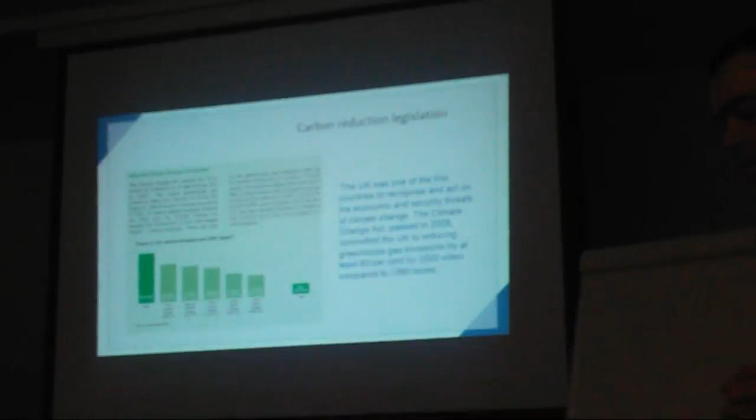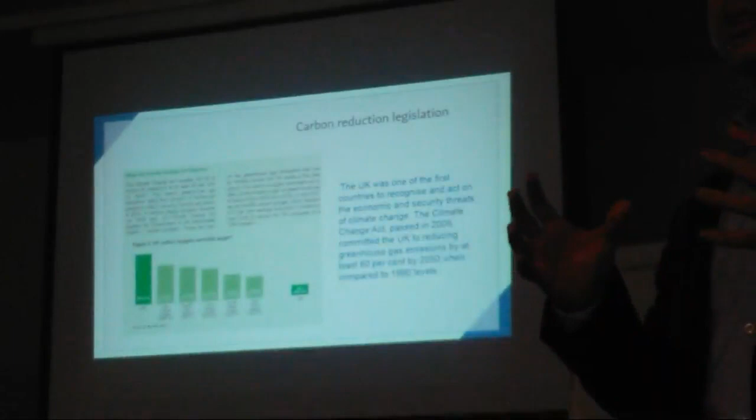So, energy policy - where do we start? Speaking to civil servants and also to government representatives, the expectation is that the heating market over the next decades will have to change radically in order to meet legal targets that are binding - for instance, the Climate Change Act and the objectives set in 2008. I think the only way to achieve this is through policy which is visionary. The problem is that the market will not move by itself, so it is necessary that there is some sort of intervention by government to make this happen, to create incentives to take up low carbon technology, but also through changes in the regulation.

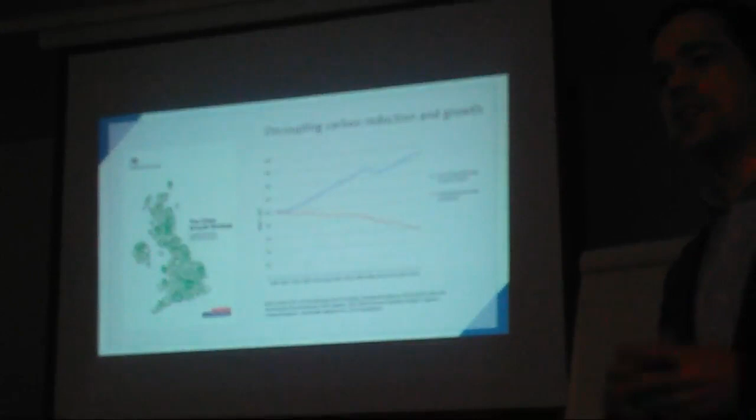At the moment there seems to be a tendency to focus more on regulation, and there's a feeling that perhaps subsidy is less effective in achieving the objectives. A key area is climate policy, as I said before. The Climate Change Act of 2008 set up carbon budgets that are binding, which the government has to meet every few years. What is characteristic in the UK is that the government embraces those climate targets. There was a seminal publication a couple of months ago called the Clean Growth Strategy, where the government said reducing carbon is at the heart of our industrial policy, and that reducing carbon emissions wouldn't affect growth negatively. As a matter of fact, the government said that out of all the G7 countries, the UK has reduced emissions the most and has achieved the highest growth.

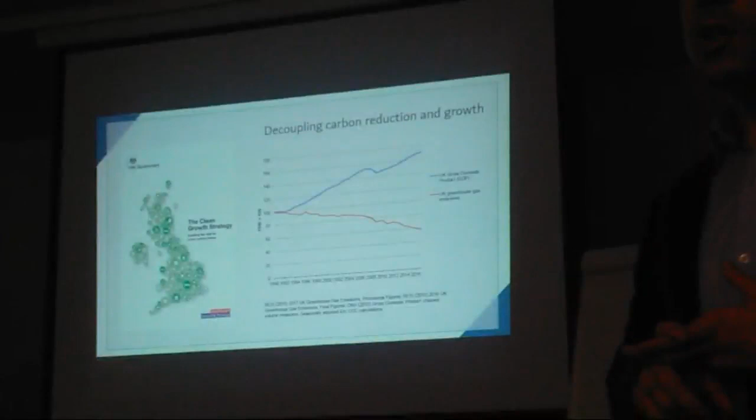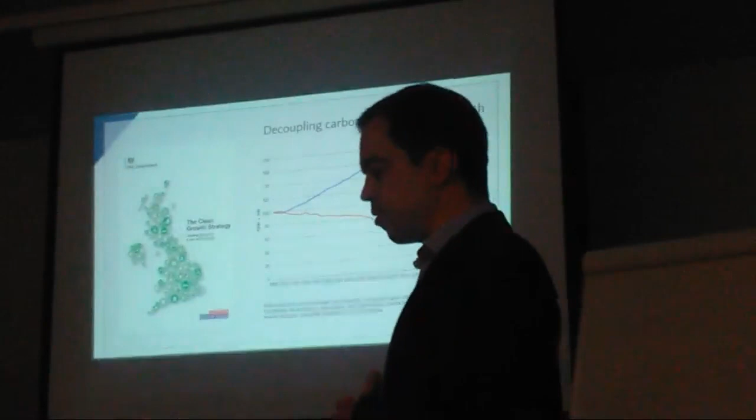Therefore, one doesn't contradict the other. And it's telling that one of the key streams in the government's industrial strategy is clean growth and decarbonization, and there is a lot of appetite to invest in those technologies. What's interesting for us is that a big share of emissions comes from heating buildings.

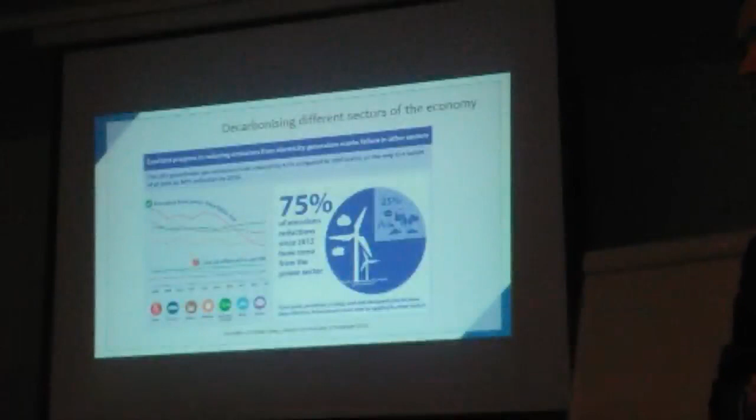You can see the red line there is emissions from electricity, from power, and there the government has been very successful. The main reason why emissions from power have reduced so much is the phase out of coal. That's been perhaps the single biggest success of the government over the past 10 years. That reflects in the carbon intensity of the electricity grid as well, which has reduced radically - although, as Kristen said earlier, not on paper.

But emissions from heating have remained stagnant. Even over the past few years, emissions from heating have increased. So this is not a success area, it's a very big challenge, and it is very difficult to achieve change in these areas. It's proven very difficult.

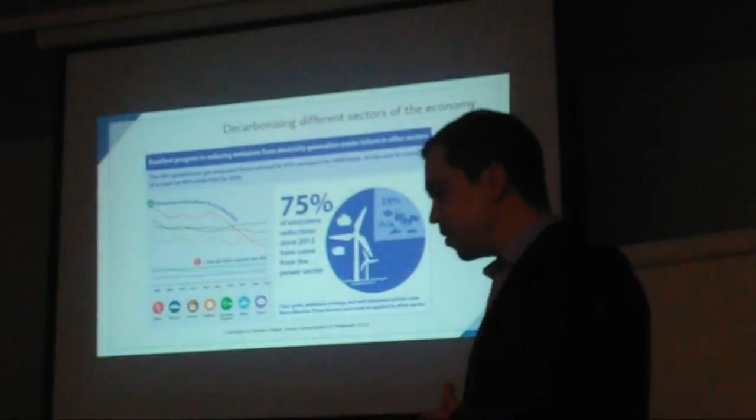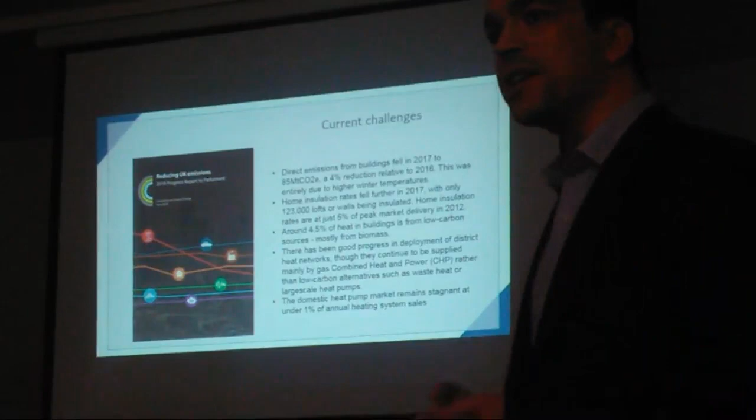These are some of the reasons, some of the challenges stated by the Committee on Climate Change - could be others. So the government hasn't been successful in increasing the rate of thermal insulation in buildings. If anything, these have reduced over the past few years. They haven't been very successful in convincing people to take up low carbon technology.

A lot of money has gone into RHI, for example, but the heat pumps market hasn't moved over the past few years. Despite all this subsidy that's gone out to support heat pumps, the market hasn't embraced it for whatever reason - there are multiple explanations for this, but it hasn't happened.

Heat networks still using conventional CHP. So the big changes - mass deployment of thermal insulation or significant uptake of low carbon heat technology - these things haven't happened yet.

And there is a realization that, again speaking to civil servants, the government has to do something. This is because the market has to change substantially by 2050, and including during the next decade, to meet objectives that are binding.

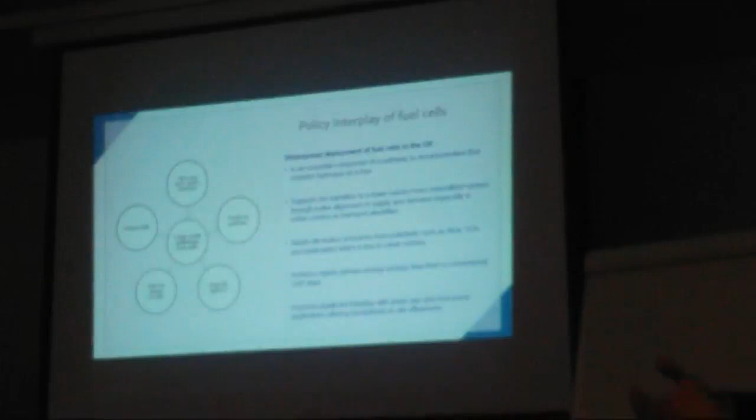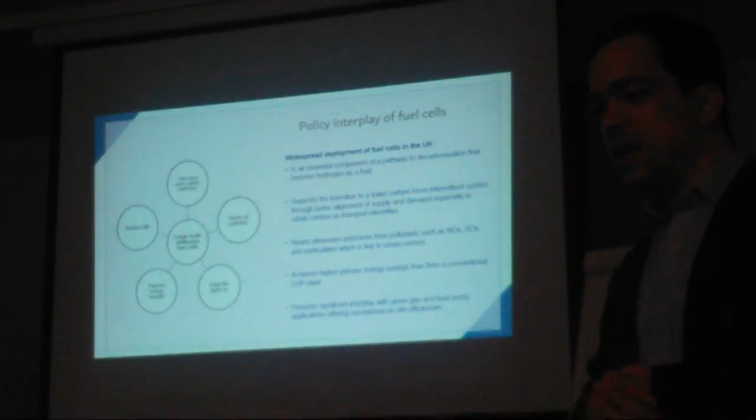So I'd say, concluding, and I'm sure Christian will elaborate, in developing all this new policy, why would the government care about stationary fuel cells? They could be relevant for a diversity of reasons because potentially in terms of efficiency they go a step further compared to conventional gas technologies. They have a very low impact, and might have a role in the context of a hydrogen future, which is something the government is currently considering. So these are some of the drivers that might make policymakers consider fuel cells.

And I'd say the reasons why the government may have to act is that carbon - this is how the government considers intervening in their impact assessments - is that fuel cells bring benefits such as reduced carbon or reduced NOx, that if monetized, make them competitive. For instance, reducing NOx has a value because it has reduced impact on the NHS. These are things the government monetizes but the market doesn't. So this is one reason why fuel cells may be considered, and with some cost reduction, they may eventually become competitive and achieve wider deployment.

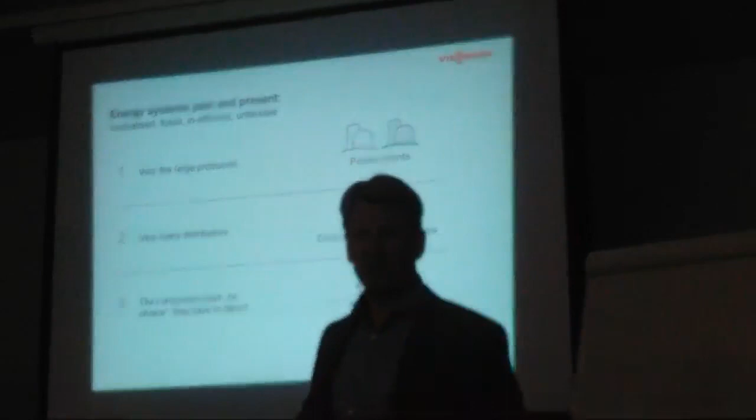So we are trying now to resolve the solution, and we are a manufacturer. Government coming to us and saying, come on guys, what is the next technology after the beloved gas condensing boiler in everybody's home? So we have to sit down, and the government is giving us targets what we need to achieve - carbon reduction, fossil fuel reduction, more renewables, etc. So we're sitting down there and we're coming up with some ideas what we're going to do. Of course, as a manufacturer, we would like to sell it as well, but we need policies, we need backgrounds to do it. On the fossil fuels, on the fuel cell technology or CHP technology, as it is, the whole discussion point came about from where we are now.

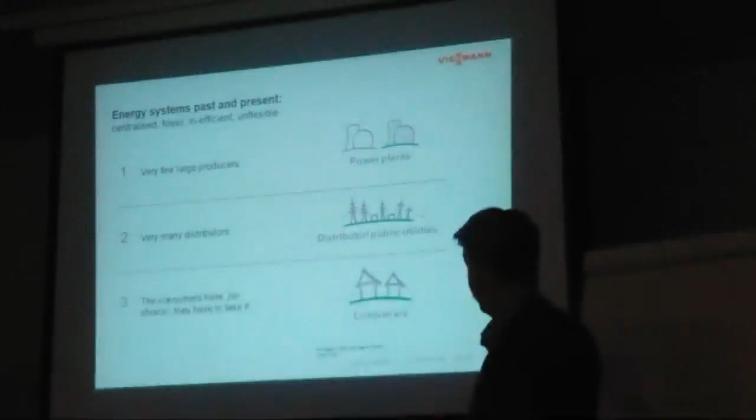In today's world, we are just changing, but historically, or maybe only a few years backwards, we had a very, very clear view of how we're making things. We have large power plants, burning lots of dirty stuff, coal, gas, etc.

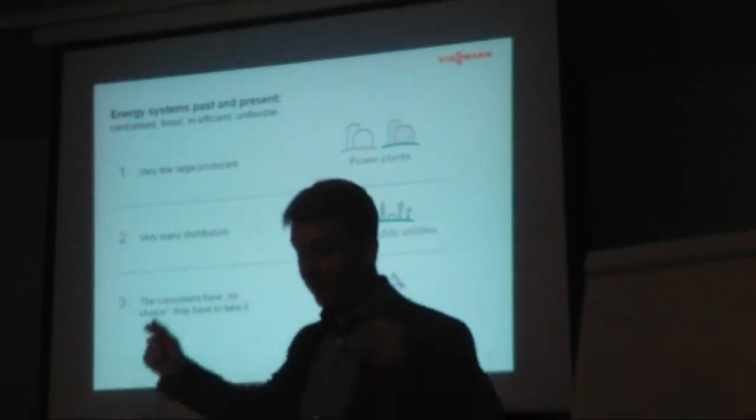Maybe some nuclear power plants, and then we have our distributors, and then they're distributing the electricity to the individual homes, and we're consumers. That was the very simple model. It worked. We plugged our electrical equipment into the socket, we get power, we have lights, the Christmas tree is on, everything is fine.

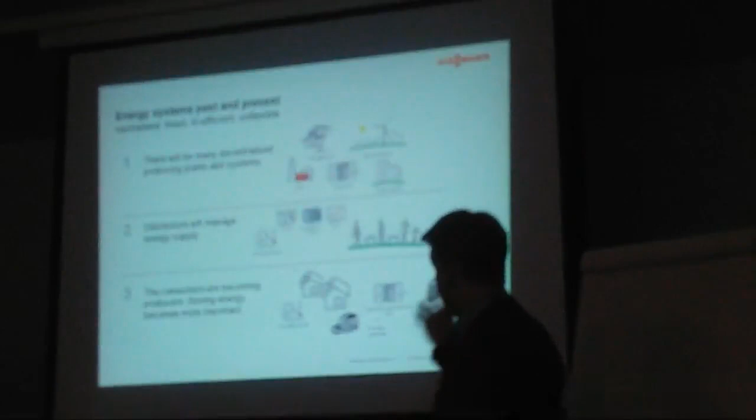But things have changed now. We have more renewable technologies in place. As I say, the UK has invested heavily in wind farms, photovoltaic systems, etc. So the electricity grid has become much greener these days than it was a few years ago. However, it came at a very high price as well.

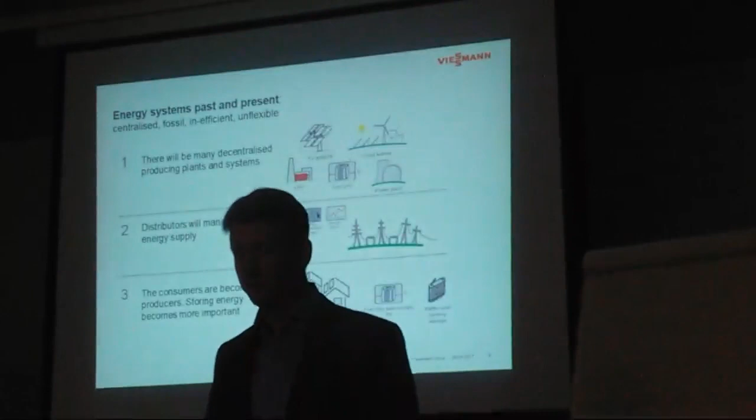The problem now is that distributors manage those peaks and troughs of electricity generation. We have large wind farms scattered around Scotland, for example. How do we get the electricity to the consumers living in Liverpool, Manchester, Sheffield, London, etc.? It's a long way for electricity to travel along the wires.

The Welsh population do not like putting new pylons up there to get the electricity back to Birmingham from their coastline. So there will be an issue there. There will be pockets of areas, clusters in the system where the grid is becoming unstable, and these poor people really have to manage it.

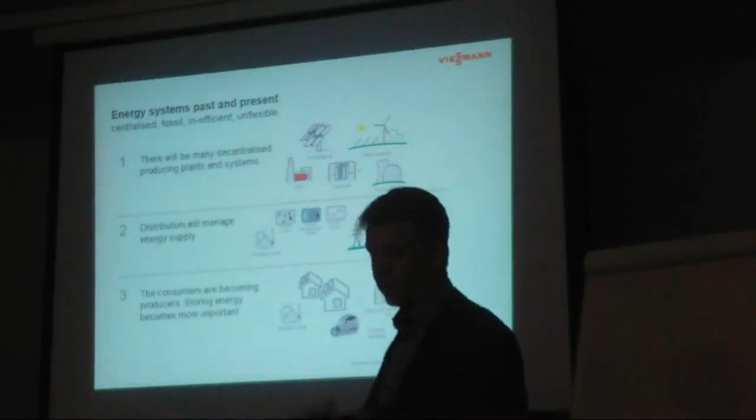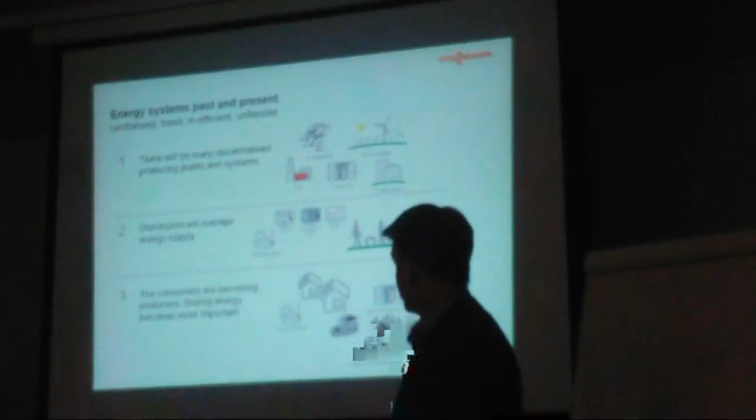So smart grid and smart metering, all these things you've probably heard as well, are meant to be part of it. And also then in the future, consumers are also becoming producers - that was the whole point.

Some of you may have seen it, we have PV panels on individual roofs, and they're fantastic, but PV panels are great in the summer, daytime. Not much electricity is used in the daytime - maybe the fridge is running - but in the evening, that's where you need lighting, televisions, etc. But PV systems don't work then.

So we have distributed peaks. Electricity also becomes more expensive, naturally, with people investing in new technologies. So therefore, electricity storage devices are now becoming sort of the flavor of the week, the month, etc. Storing energy is a problem right now, because the average homeowner pays 14 pence at the moment for electricity per kilowatt hour. Storing a bit of electricity makes it very expensive. But there are different technologies involved.

But why are we doing, you say, micro CHP technology? As I say, it's a technology which puts the homeowner in a position to not only make their heat for space heating and hot water, but from the same device produce electricity.

So the advantage from the homeowner's point of view is that you're creating your own electricity as a base load throughout the year - at night, in the winter, in the summer. So we have a much more stable production. The grid producer loves it because we're taking some pressure away from the grid systems as well.

We're also trying to promote this fuel cell as a transition period. Elias has mentioned as well, hydrogen is now a big thing. It's not in government's views - hydrogen is many years away. It's a starting point. Fuel cell technology is available today, and we believe the transition to introducing these technologies over the next few years is a very important transition period.

But again, this also sets the ground level for new technologies, new developments, and therefore it will create jobs as well, in manufacturing facilities, etc.

But most importantly, from the homeowner's point of view, there are potential savings to be made for them in terms of producing and generating their own electricity rather than buying expensive electricity from the grid. So that's the fuel cell, one of the purposes there.

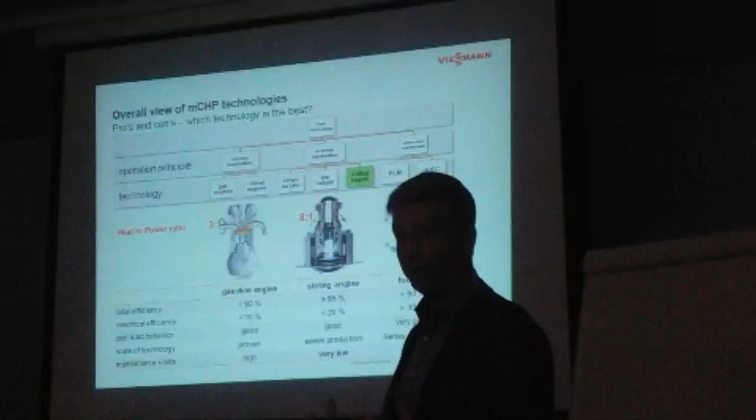I have to say that even the Stirling engine was only a transition technology for us. Our end game as a manufacturer was always working towards fuel cell technology, because of its efficiency, and most importantly the heat to power ratio, which is so critical for any property. Basically any electricity-making generator also generates heat, and that heat has to be absorbed into the building.

The whole point of having a micro CHP technology in the house is the total efficiency. We're talking about over 90%, rather than 35% from the grid, let's say. The fuel cell has got the big advantage of a heat power ratio of 1 to 1.

The Stirling engine has an 8 to 1 ratio, which is the reason it didn't really work in the marketplace. It was also quite noisy, high frequency noise, woke people up in the night, the pipe was shaking. So it was the wrong product for the market really, more for commercial application.

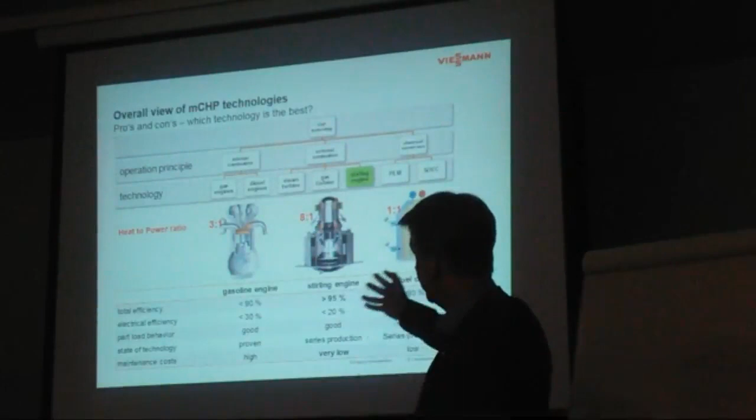The other one is the combustion engine on the left. This is the one you probably see in the commercial world, what we call CHP technology, with a traditional gas engine fitted in. Very effective for commercial applications, not so effective for domestic. You don't want to replace or change the oil in the filter in a domestic application, people will not accept turning up 3 times a year. Commercial application is a different story, very effective technology in the commercial world, but yes, you have very high maintenance costs.

So the fuel cell was always the one which, from the efficiency point of view, the heat power ratio was the most optimum solution. But it was expensive to make.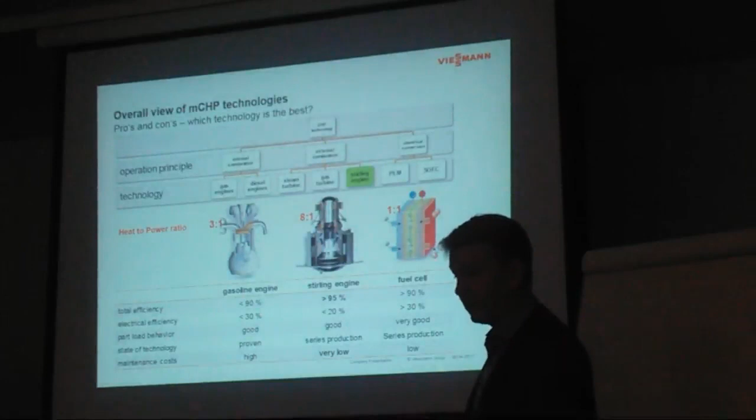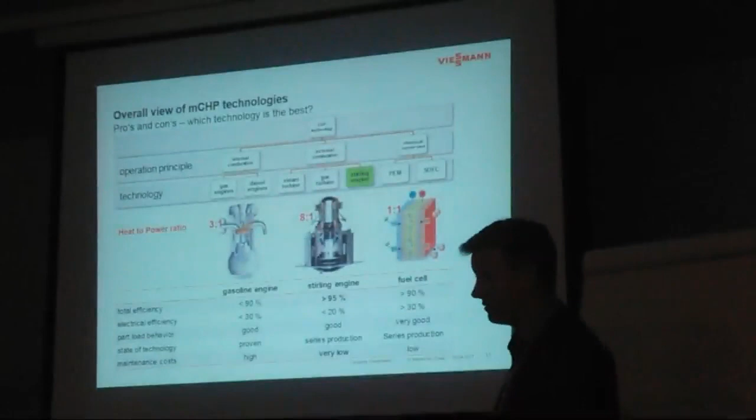In today's world there are 2 types of fuel cell technologies in the market. One is PEM fuel cell, proton exchange membrane fuel cell technology, which is a low temperature fuel cell, and the SOFC, which is a solid oxide fuel cell. I don't want to go into the technical side of it, but these are the 2 significant technologies now established in the marketplace.

Solid oxide, high temperature, is really more for commercial application. It has to run 365 days a year, it's not really ideal to turn it on and off. PEM fuel cell is the one that's more interesting for domestic application, very low maintenance, hardly any at all, but you can switch it on and off when there's no heat demand. So if people are going on holiday in the summer, you can turn this machine off if there's no demand, and you can do that with the low temperature fuel cell. So these are all technologies that are appropriate and proven these days.

This gives a short example of why we are going to this fuel cell technology. Just quickly to understand this graph: the bottom axis is the building heat load requirement. The further we go to the left, we're talking about very efficient buildings, very low energy demand, low water demand, and the more you go to the right, very high energy demand - so new build versus old building, Victorian style, 3-4 bedroom house, very high energy demand.

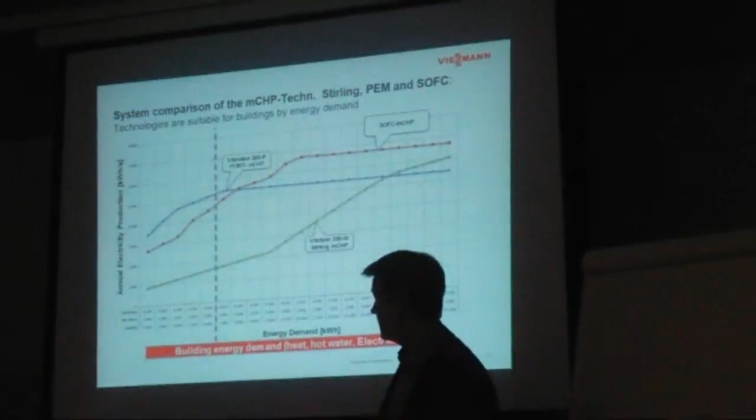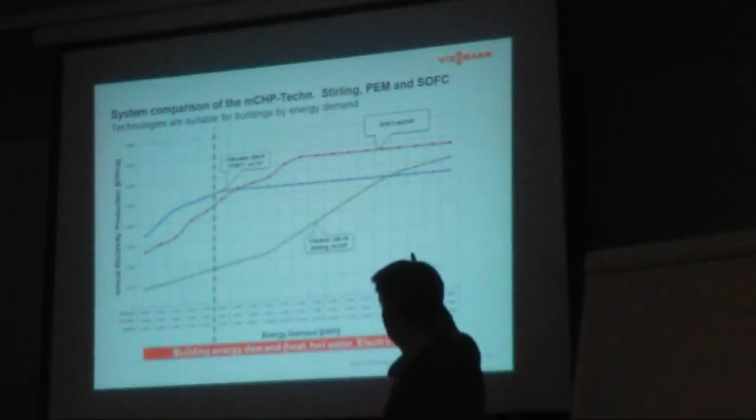The Stirling engine, the green line, on the y-axis you see the annual electricity generation from these technologies. The green line, the Stirling engine, is peaking its output performance at very large buildings, commercial buildings, 30,000-40,000 kilowatt hours a year and higher, generating the right amount of electricity of 4,000 or 5,000 kilowatt hours a year.

The fuel cell technology, particularly the PEM fuel cell, the blue one, you can see is suitable for low energy homes. You can have it for new build, for small properties in the UK, or for larger properties. So currently this technology is employed from small to big, covering I would say 80% of the UK housing stock in theory, in the way it's designed, and you can turn it on and off.

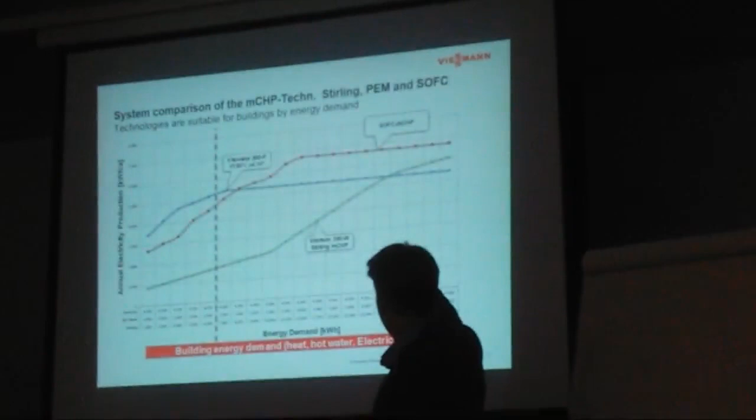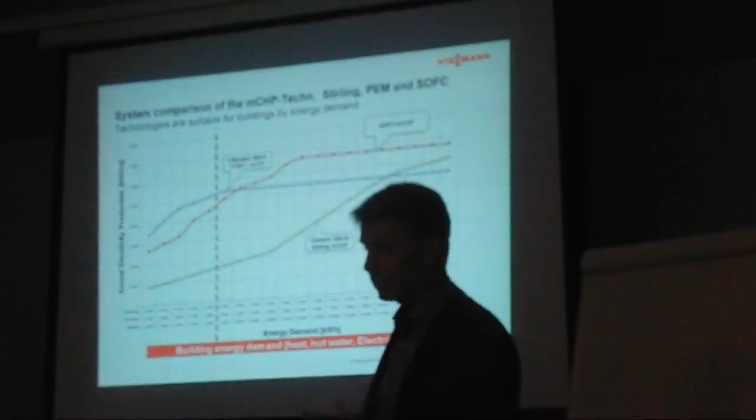The red one is the high temperature solid oxide fuel cell, and again that's more applicable for larger properties, and we'll be using it for small businesses etc. So that is the reasoning for why the fuel cell has been earmarked as the most applicable technology for residential properties in this world.

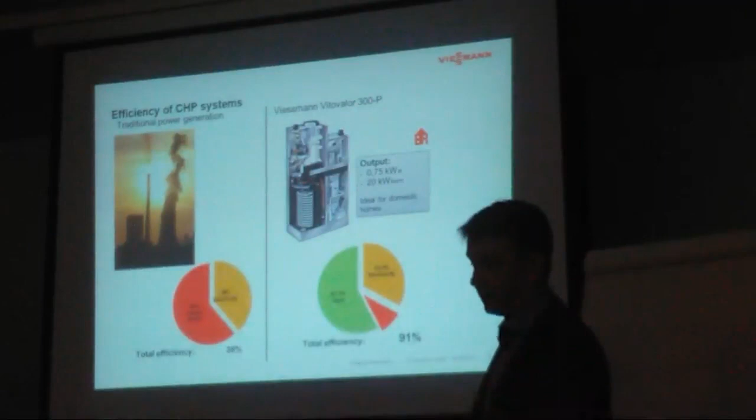Going further, yes. So again, traditional power generation currently has an efficiency of about 38%. That means from the primary energy factor point of view, the energy we're putting in to make electricity, including losses in cables and transmission, we're talking about 38%.

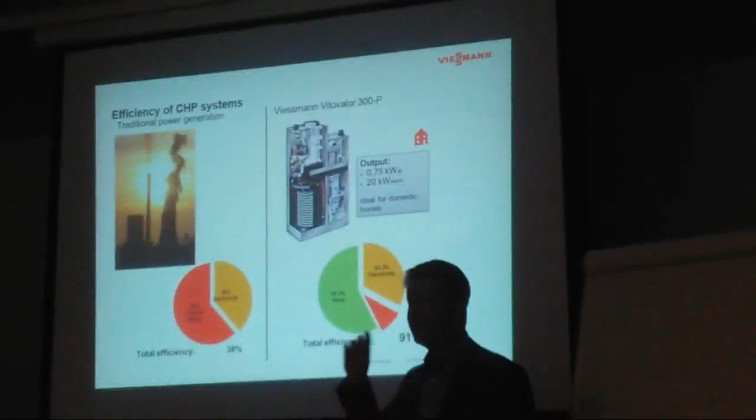The total efficiency of a decentralized micro CHP technology, a fuel cell technology, is more than 90%. Interestingly, if you just look at it from the electricity point of view, fuel cell micro CHP versus grid power, the efficiency is very much the same. The key point is why this technology is so efficient is because of the bit of heat it generates, which you use for heating and water.

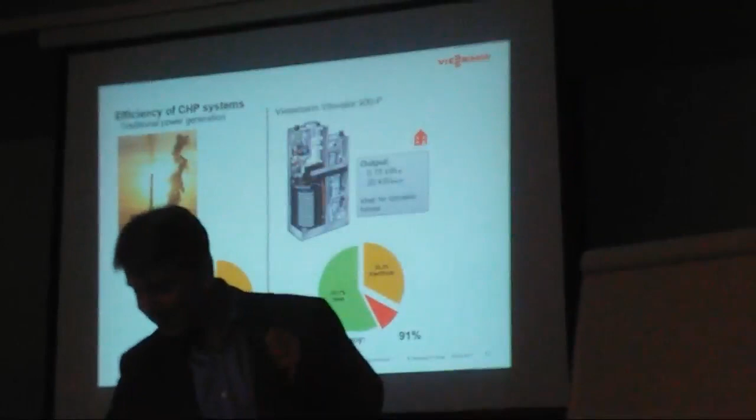You cannot dump it. I get comments from people saying, 'I put a dump radiator in the garage to force the machine to run.' Wrong thing to do. We are not dumping any heat. If you dump the heat, your efficiency drops straight to 33%, and that's not what you want. Then people complain that their gas consumption is so high and they're not really getting the benefit. So that's the whole point—we are utilizing the heat from electricity generation as well as making our own electricity on site. That's the whole story of this technology.

So again, we are supporting the energy transition period. We are living in a world where condensing boilers are the norm these days. They've existed for the last 25 years. Since I came into the industry, that was when condensing boilers were first developed, and since then the industry has not moved on.

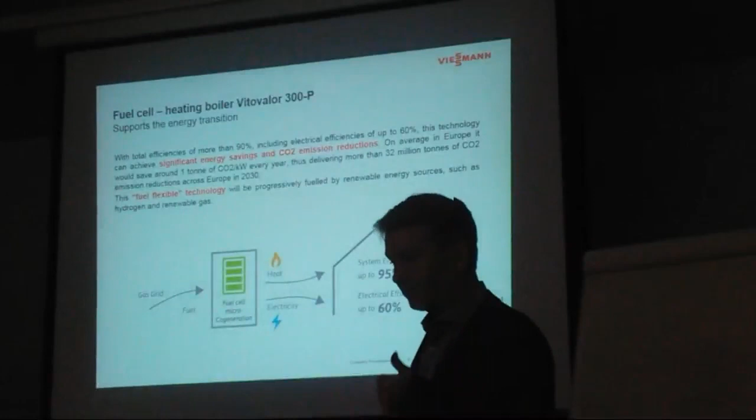Yes, we were tinkering around with some solar thermal panels, some heat pumps, and as Ilya said—though I disagree with his comparison—5% is renewable in the UK, I think it's actually 0.5%. If you look at the true figures, 1.6 million gas boilers or heat generators are installed every year, and 97% of that is gas. That hasn't changed for the last 12, 15 years. It was always the same.

So we are offering a solution there, making the whole house energy efficiency aspect more efficient. That's what we're trying to do with fuel cell technology.

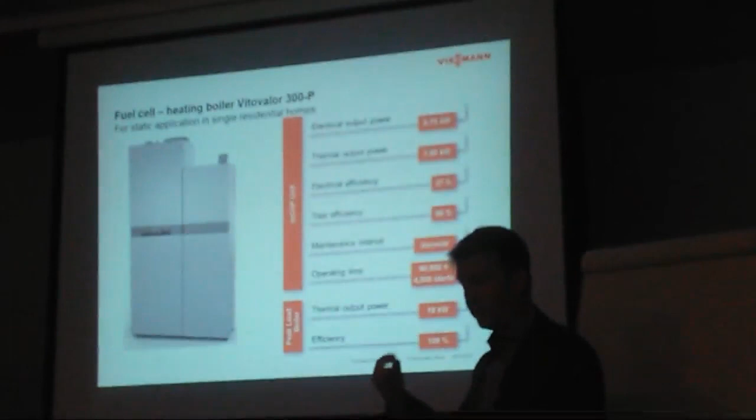So a typical residential product—we're not mentioning any names—gives you some key values here. We're talking about a 750 watt fuel cell generator built in with a thermal output. That's what I mean, the fuel cell just generates a bit of heat through the processing and reformer aspect, only 1 kilowatt though. That doesn't sound like a lot, and it's not really a lot, but you can easily disperse it into your existing heating system, into hot water, preheating hot water, etc. It works very well.

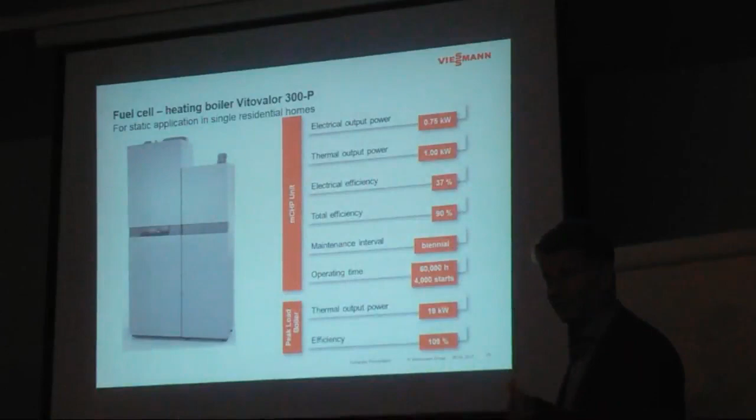We are achieving run hours of the generator of about 6,000 hours a year. Now, a whole year has 8,760 hours, so running a fuel cell at 6,000 hours is a good go. A Stirling engine probably would only run for maybe 2,000 to 3,000 hours a year. So that's the key benefit of this.

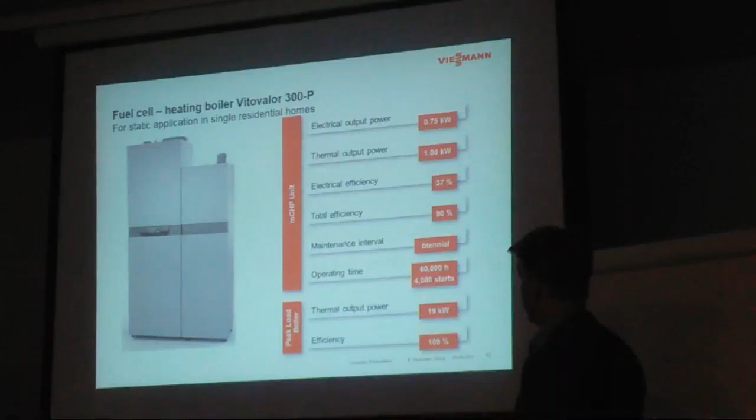Efficiency is 90%. There's some maintenance involved with the fuel cell, but not very much—it's limited to filter changes, air filter change, or deionization water filter. Very little maintenance at all. The gas boiler, which is a peak boiler next to it, a modern gas condensing boiler with full weather compensation controller, very efficient, still requires an annual service according to UK recommendations.

So that's that. Now, just very quickly, talking about the fuel cell and what we do with it—the fuel cell has some other advantages. We are not dealing with moving components in the fuel cell; it's a chemical or electrochemical process.

So if you cast your mind back to the GCSE times when you went to school, we have chemistry lessons, physics lessons, etc. All this, what you've learned many years ago, or maybe you're learning it now, you have it in the fuel cell technology.

So what we do is we're using the natural gas from the grid, which is readily available. 90% of households are connected to the gas grid. The gas contains, calling it CH4. The gas goes to a reformer inside the fuel cell, and with that reformer we're injecting steam into this. Steam is water, and that reaction causes us to split the molecules from methane into hydrogen and CO2. The CO2 then goes into the fan, into the exhaust of the product, and the hydrogen is utilized.

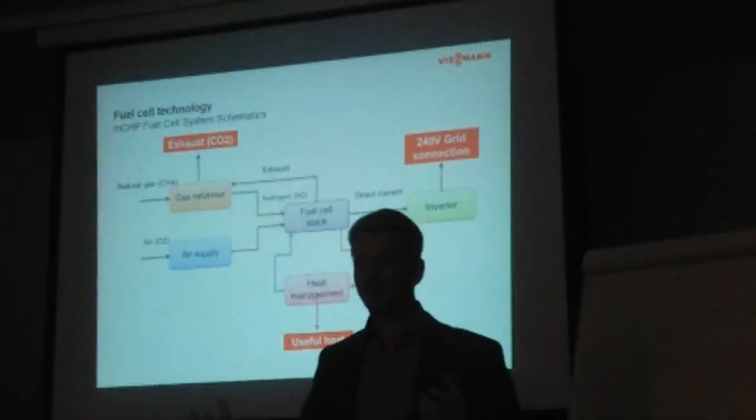Then we are pulling in air from the outside, oxygen, that's what we're all breathing in, into the fuel cell stack, which is what we call a battery cell, but it's a battery cell which never discharges itself. The hydrogen with oxygen, as we know from physics, are very reactive, very aggressive. From that process we are then generating DC power in that battery. That DC power then goes to an inverter, which converts it to AC power, and then it's connected to the household grid.

So the bit of heat created from this goes to a heat management system. We're calling it a plate heat exchanger, buffer vessel, storing that heat in the form of water heat, and that's then used for preheating your water for showers and bathrooms, or for space heating. And that's all what it is. So there are 4 very key building blocks in that machine.

If you ask me the question, well, what about the hydrogen? If the government goes to a hydrogen grid, you can see the gas reformer, that's the one which we use right now, because we do not have a hydrogen grid. It doesn't exist right now, so we have gas, that's readily available. But if we do have a hydrogen grid in many, many years maybe to come, perhaps, if the government is happy to spend this huge amount of money, then a large proportion of the cost of the fuel cell could be reduced by removing the reformer and having just hydrogen in the grid straight into the fuel cell. So that's a process.

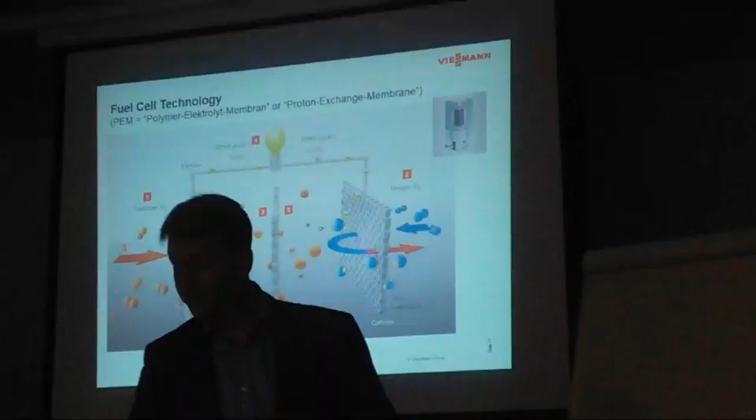Goes along. The fuel cell stack itself, again, we stick with our chemistry lessons. It's just a little picture there. We have the plates, just a stack, it's about that big. Lots of plates in there. These plates are coated and defined in terms of an anode and cathode, positive and negative pole.

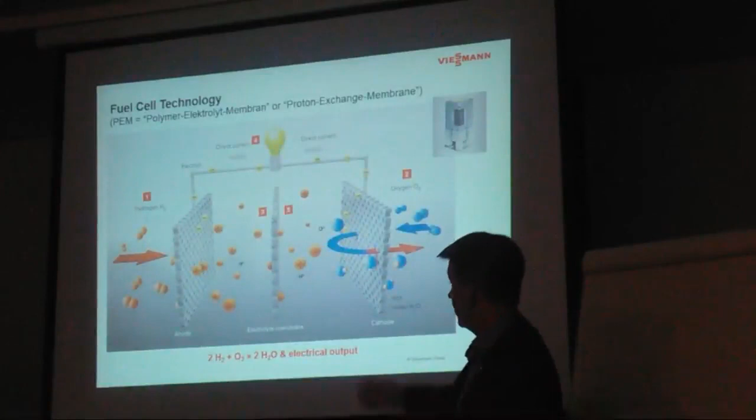Then basically moving the positive protons going through the mesh filter, and the negative electrons is doing what the definition of electricity is all about. It's about moving electrons. We are picking up the direct current from there, like a light bulb, and on the other side we have as a waste product the hydrogen molecules getting together with oxygen. The waste product is water, just water. We are recycling that water for our injection process in the reformer later on, so there's no real water top-up required, it's all self-contained, and that's the whole process.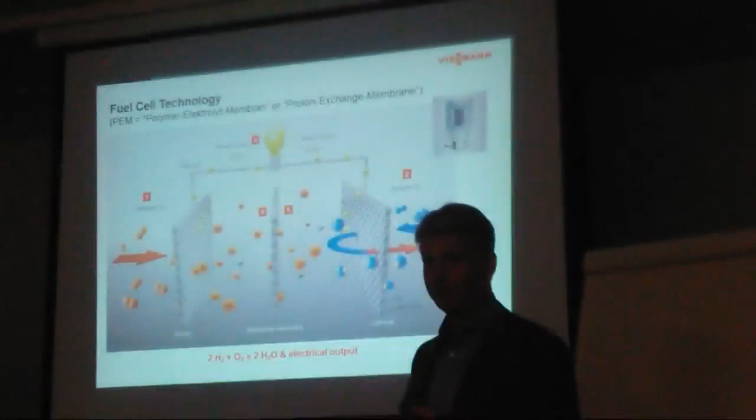So you can see, this is what you see, this is what it is. There are no moving parts involved, there's no noise level involved, and the key benefit of the fuel cell technology is it doesn't generate any NOx. That's a key benefit also from the government point of view. There's no NOx generated, like with combustion products or like our gas boiler. It is all NOx free.

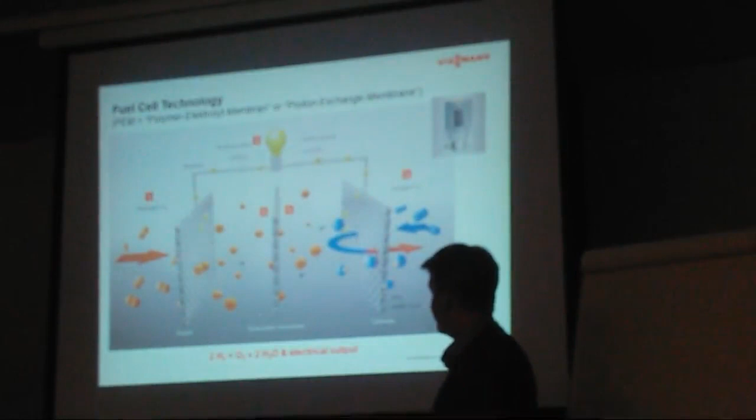So again, here for our engineers, this is the chemical reaction formula. We have 2 parts of hydrogen plus 1 part of oxygen feeding into the battery stack, and we get 2 parts of water out of it and power, DC power. That's the process. That's the way it works. I have to say, from the experience which we have, it's a very reliable process as well. It's reliable because it's a chemical process. It's as reliable as it is.

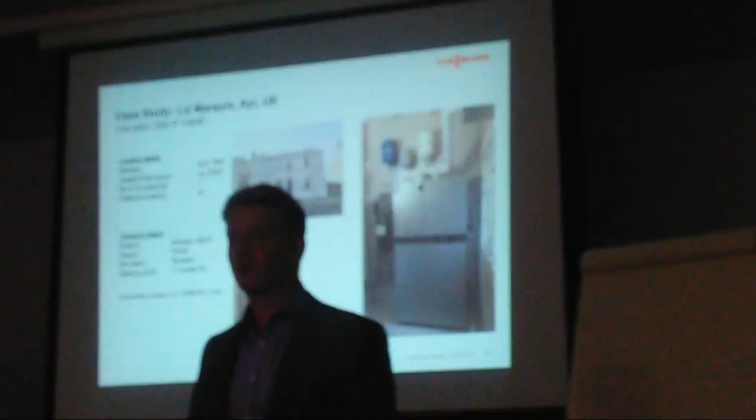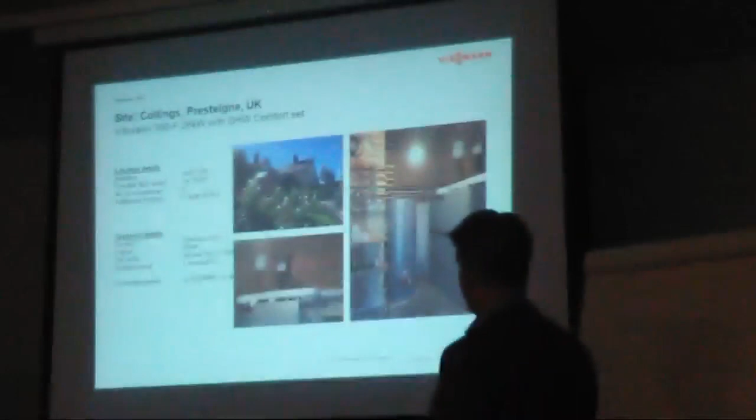So we're generating as much electricity as the household needs for the year. Then we have another property - again this is the old farmhouse in Herefordshire, a very big property. They used a fuel cell with a large hot water cylinder, and this machine has been running ever since. We think it will probably top our best list in terms of 5,000 kilowatt hours of electricity generated per year. This property was predominantly fitted on oil, but luckily they have a gas pipe on site, so we connected them with a fuel cell there.

So then we have also a few solid oxide fuel cells installed in the UK. St Andrews University was very keen to have a few of them - they actually installed 5 of our solid oxide fuel cells, and they are heating up buildings from St Andrews University. There are a few technologies of that type around, and they're all doing what it says on the tin - they just run and run and run, and everybody is happy. The biggest benefit is that people are reducing their electricity significantly.

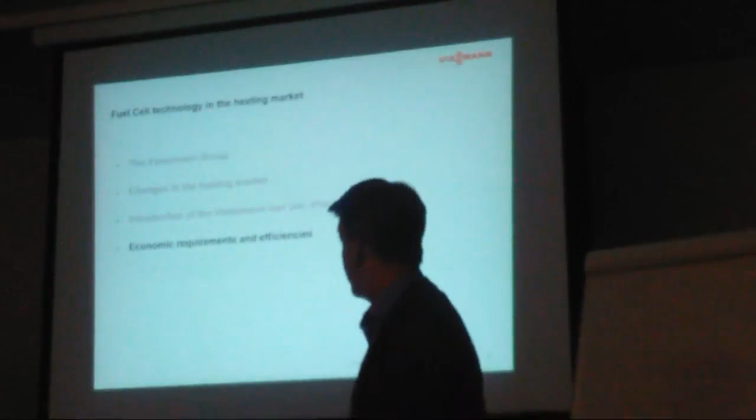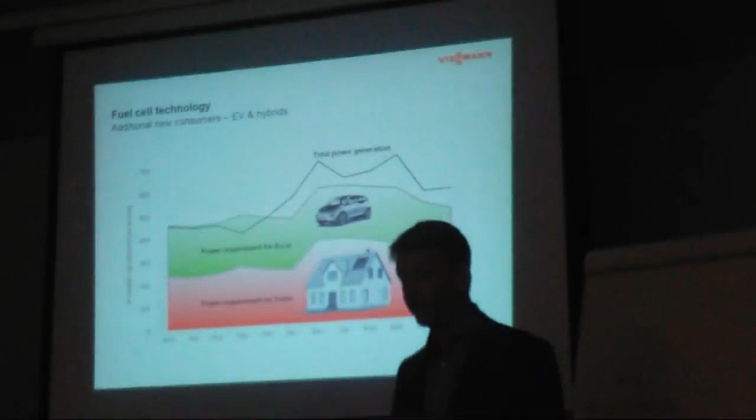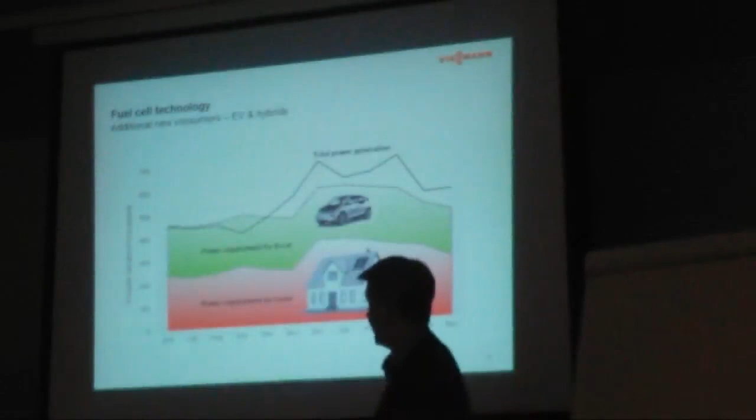Good, so finally coming to the end. Other new customers for this type of technology are the electric vehicles industry. This is an ever-growing market, and most consumers who bought an electric car didn't realize that the electricity goes through the roof if they've got a charging point at home - that could be significant. Up to 3,000 kilowatt hours will add to homeowners' electricity bills with an electric car if they're charging it at home. For people who've got it, it's fantastic news, because the electric car will add to the base load of the property, and therefore maximize the use of your own generated electricity in the household.

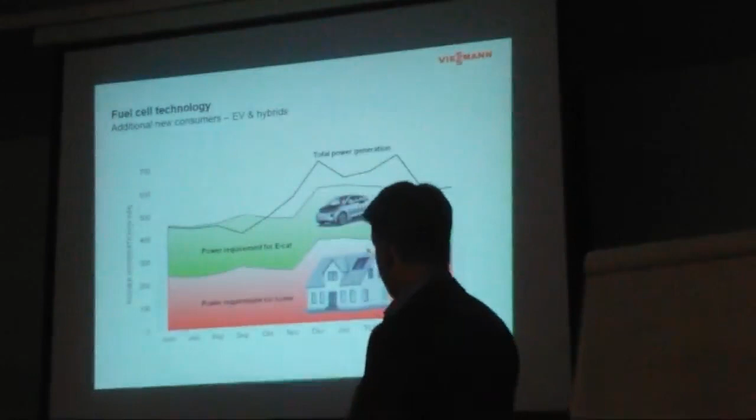Fantastic. So instead of people saying 'you're exporting lots of electricity, I want to use it more' - that's maybe fine for some properties, but others who have high electricity consumption, with an electric car it will actually be much more beneficial, and therefore electric cars at home will be an additional bonus for them.

This technology is obviously expensive as well, and we need to convince end users to pay the extra money for this. Luckily, we still have Europe on our side - the European fuel cell and hydrogen group has given manufacturers quite a lot of money to support the rollout of fuel cell technology. It's called PACE, a pathway to competitive European fuel cell in the micro-CHP market. They're also supporting stationary fuel cell technologies for powering IT centers and telecom masts, etc. That funding helps us right now to offer this technology at a more tangible price to customers.

That funding is limited, obviously. We've been given lots of money, and in return we have to install so many products of this in a certain period of time. The idea, as with any investments and funds, is that it helps manufacturers like us support the market with new technologies, bring them into the marketplace, generating higher production turnout, and that helps us reduce manufacturing costs. As I said, the total European market for gas condensing boilers is more than 5 million boilers installed every year.

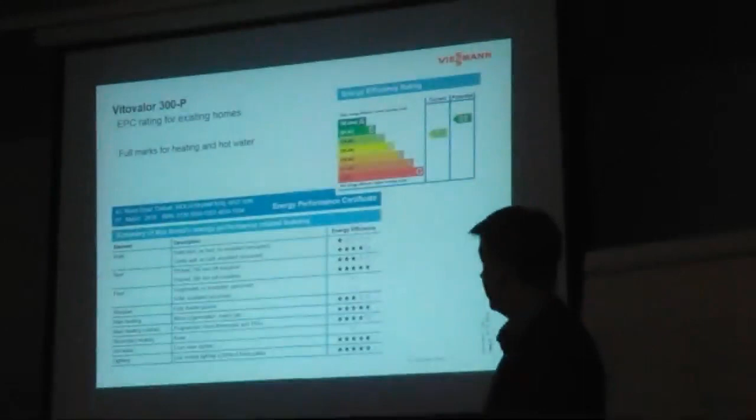So this is an example - I'm a lucky user of this technology in my property. I had an F-rated property before. The assessor came in, spent about 2.5 hours trying to make sense of the technology - it was very good. You can see micro cogeneration is on the EPC listing. I got full marks for heating and for water. Unfortunately it didn't accept my double glazing windows or my solid brick insulation, because it wasn't rubber stamped and I haven't got a certificate for it.

But the news is that it has lifted the property to a type C. The property I'm living in is 110 years old, so thanks to the technology it just helped as well. It is recognized in the EPC database how valuable this technology is - that makes it so special.

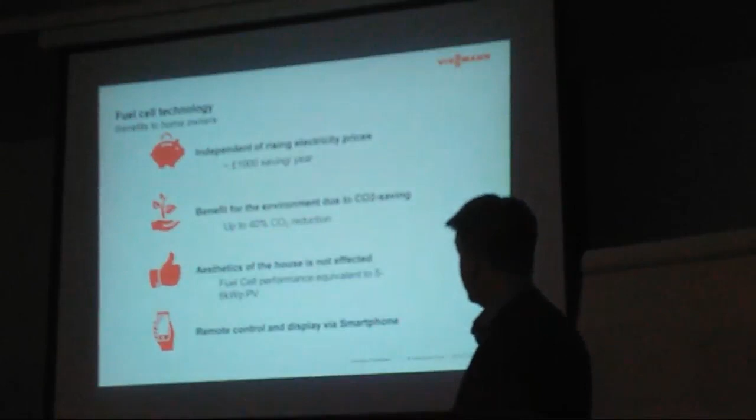So homeowner benefits - independent of rising electricity prices, that's very key for homeowners. They're not really bothered about carbon savings etc, they're not planting trees paying extra just for nothing. People want to see hard cash. So the incentive scheme and the electricity saving they see on the property is a huge motivator. Yes, if you want to talk about CO2, currently it saves up to 40%, but as we said earlier, the improving carbon intensity of the power grid will make that number a bit less. But from the homeowner's point of view that's not so critical - maybe from a planner or new build planner point of view, more so.

I also find that lots of homeowners and house builders don't really like PV panels on the roof because aesthetically it destroys the appearance of the property, or maybe the roof isn't big enough. But the performance of the fuel cell is equivalent to about a 5 to 6 kilowatt peak installed PV system - that's a massive PV system, 30 square meters. Not many domestic houses are actually going that high - I think the maximum is less than 4 kilowatt.

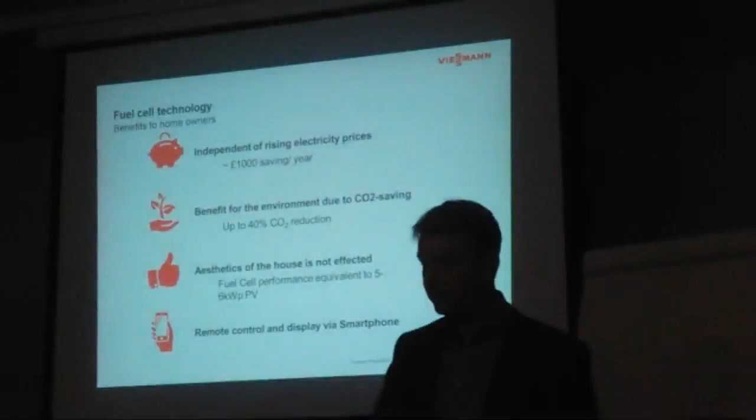And then speaking of smart technologies, there are smart features involved in this. Homeowners can remotely brag to their friends in the pub about how much electricity they've generated themselves, etc. So it's a very interactive system. But most importantly, from the homeowner's point of view and from us, through that PACE funding which I've mentioned before, we are obliged to offer the client a full remote monitoring service.

So people are quite cautious that they're spending lots of money on this, and our message is that we are obliged to support them for the next few years to come. So we can see their property every day - on the phone, on the computer. We can even make remote adjustments without actually turning up.

There are many stories in the winter where we can tinker around with their settings, and the next morning they're phoning me up saying 'what have you done? It's nice and warm now' or 'it's not working.' So it's great - the interaction between homeowners and the manufacturer is as close as it can ever be.

Good, so I think I'm coming to my end now. If you have any more questions, please fire away.